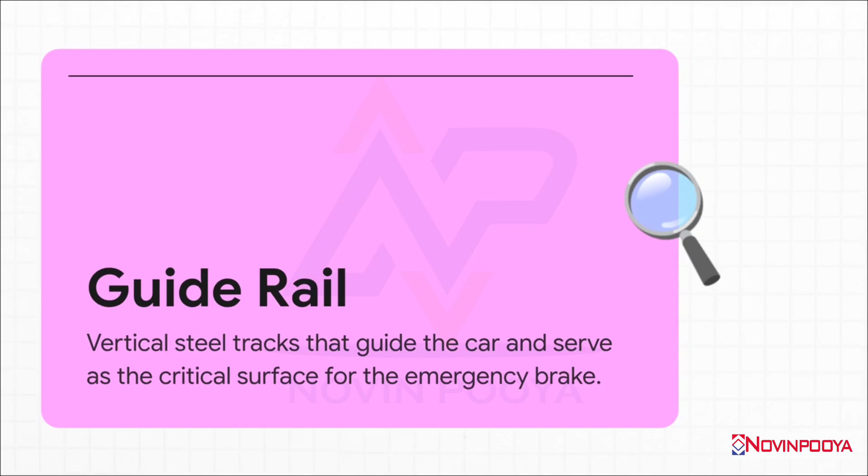So it's got to be perfectly smooth for the daily ride, but also unbelievably strong for that one moment you hope never ever comes. All right, so let's talk about the guide rail's day job. Every single trip, whether you're going from the ground floor to the second floor or all the way to the penthouse, puts these rails under a constant, complex barrage of forces. It is so much more than just keeping things straight.

We can basically break down these everyday forces into two main categories. First up, you've got your static loads. This is just the simple, constant weight of everything just hanging there. The car, you, all the other passengers, and that massive counterweight. But the second the elevator starts to move, you introduce what are called normal dynamic loads. All the forces of starting up, slowing down, and even tiny little movements.

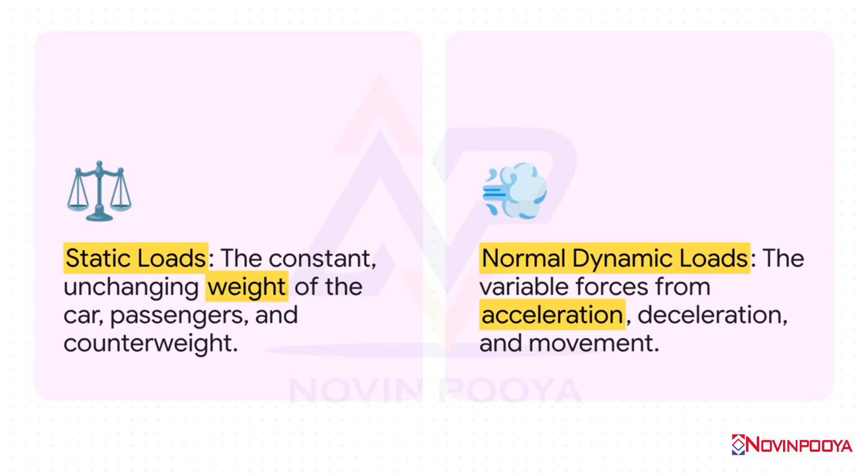I mean, just think about all the different forces that are at play on just one trip. The rails aren't just supporting the simple up and down weight. No, they're constantly fighting inertia when the car starts and stops. They have to absorb these tiny side-to-side vibrations to make sure the ride feels smooth. And they're even engineered to handle an unbalanced car. Like when everyone for some reason crowds into one corner, the rails have to deal with that too.

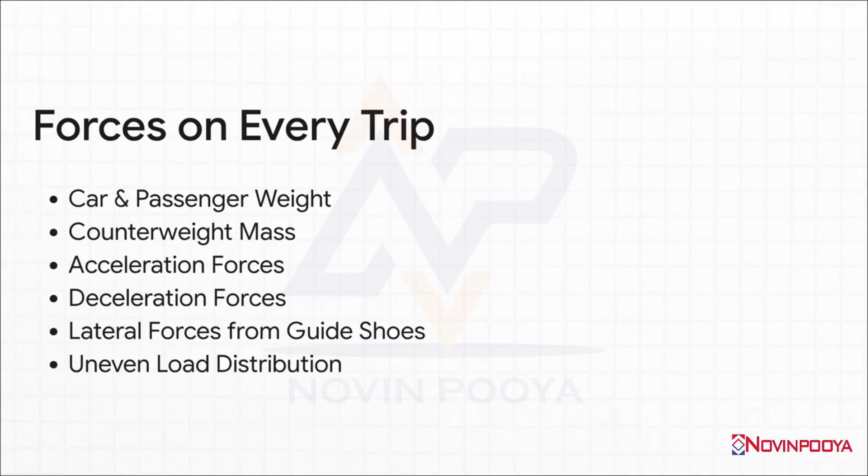But look, managing a smooth daily ride, that's just the beginning. The real genius, the true art of guide rail engineering, isn't about handling what's normal. It's about being prepared for the absolute abnormal. This is the core principle of safety engineering, and it's something Novin Pooya Elevators analysis really hammers home. You don't just hope for the best, you meticulously, painstakingly plan for the absolute worst. Every single calculation is made with the assumption that something somewhere could go catastrophically wrong.

So, to do that, engineers analyze four critical scenarios, what they call load cases. First, you have normal operation, which we've covered. Then there's something called a buffer impact. That's if the car were to overshoot the bottom floor. In some places, they even have to design for a seismic event, like an earthquake.

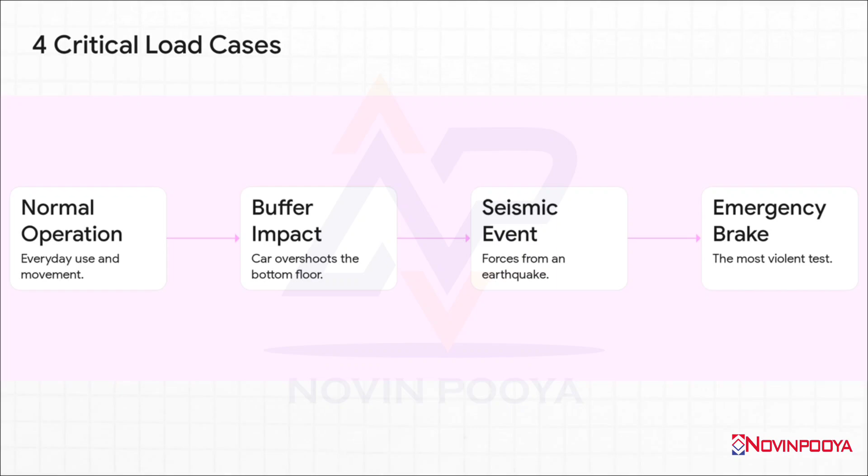But that fourth case, well, that is the single most violent test that the entire system is built to survive. And this brings us to the climax of our story, the emergency stop. We are talking about the moment the safety gear activates at full speed.

Just try to imagine this, the entire weight of a fully loaded elevator car, moving fast, being brought to a sudden, violent stop. All of that kinetic energy, all of that momentum, it all has to be absorbed and dissipated almost instantly by the safety gear clamping down with just incredible force right onto the guide rails.

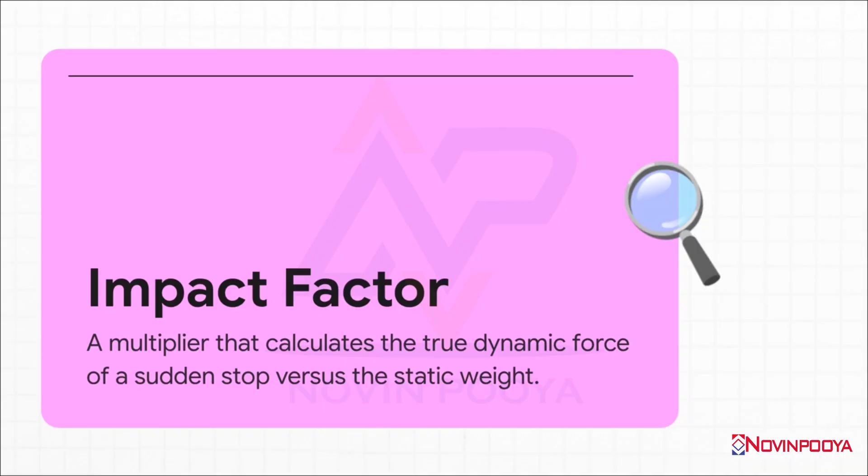Now, to understand just how massive this force is, engineers use a concept they call the impact factor. It's basically a multiplier that tells you how much bigger the force of a sudden stop is compared to just the simple static weight of the car. Think of it like this. It's the difference between just holding a bowling ball in your hand and trying to catch one that's been dropped from a roof.

So what does that multiplier actually look like? Well, during an emergency stop, the forces don't just double. Engineers have to calculate for an impact factor of anywhere from 2 all the way up to 8. Yeah, just let that sink in for a second. The force that the guide rails have to withstand, without bending, without breaking, without buckling, is suddenly up to 8 times the weight of a fully loaded car.

That is an absolutely astronomical amount of stress, and it's all concentrated right on those 2 steel beams. So the big question is, how is that even possible? And this brings us to the blueprint, the engineering that makes this incredible feat of safety possible. It's a systematic process of analysis and calculation designed to guarantee that the rail will not fail.

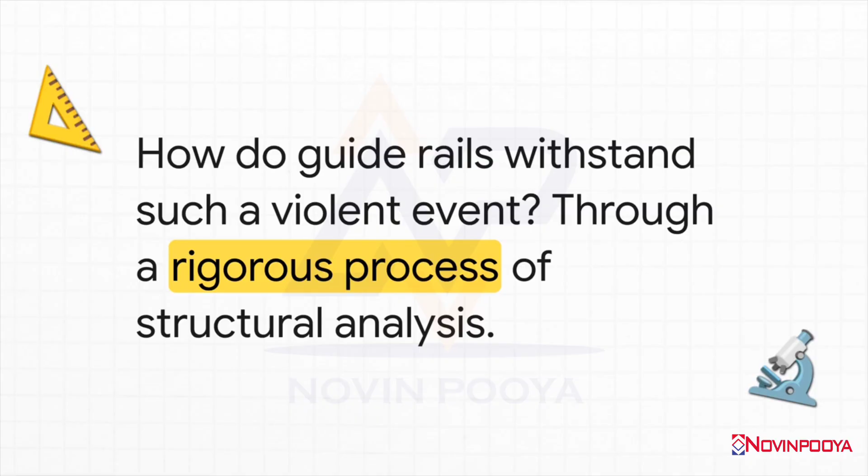The answer lies in a super meticulous structural analysis that checks for every single possible way the rail could fail under that immense load. It's a methodical process that leaves absolutely nothing to chance. So, engineers perform 3 critical checks. First, a bending analysis, which asks, will the rail bend or flex too much under the sideways force? Then, shear analysis. Will the force literally slice through the steel, especially near the support brackets?

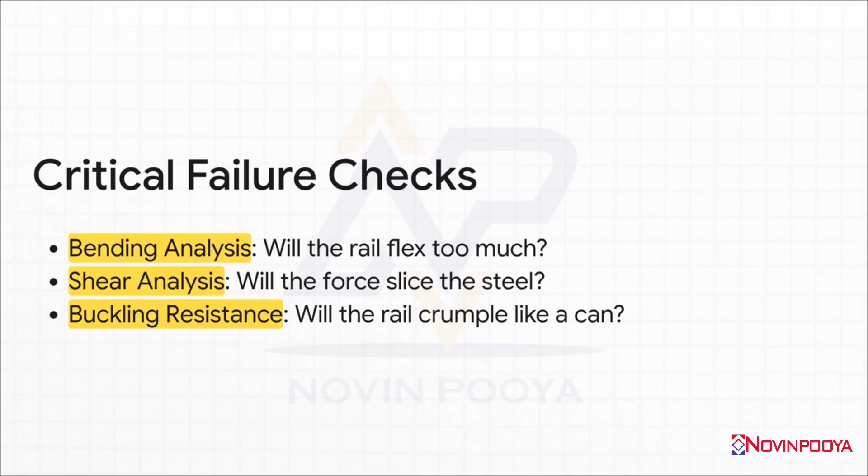And maybe most critically, buckling resistance. This determines if the massive downward compressive force will cause the entire rail to crumple and collapse, kind of like an aluminum can that you step on. And this whole process is incredibly systematic. You see, the engineers input all the key data: the car's weight, its top speed, the exact steel profile of the rail, even how far apart the support brackets are.

Then they run all the calculations for bending, shear, and buckling, and each and every one has to pass a strict safety check. If anything fails, anything at all, the design gets stronger. Maybe a thicker rail, maybe closer brackets, and then they run the whole test all over again until it passes.

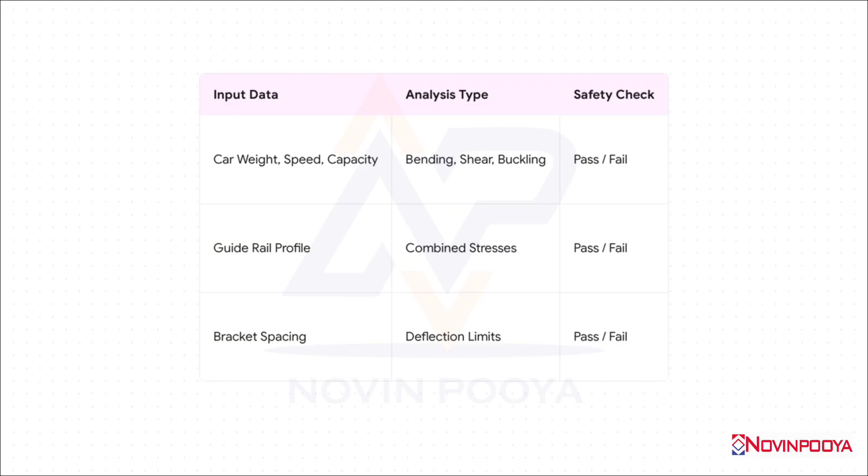Now, this is really important. This isn't just one company's internal process or a good idea. These calculations are mandated by strict international safety standards, things like EN 81 in Europe and ASME A17.1 over in North America. These global rules make sure that no matter where you are in the world, the elevator you step into is built to the exact same, incredibly high, non-negotiable standard of safety.

So what does all this complex engineering and all these intense calculations mean for us, the people actually riding in the elevator every day? Well, it means we can ride with absolute confidence. The Novin Pooya elevator analysis that really inspired this whole explainer puts it perfectly. It describes the guide rail calculations as forming the vertebral column of safety, ride comfort, and long-term stability.

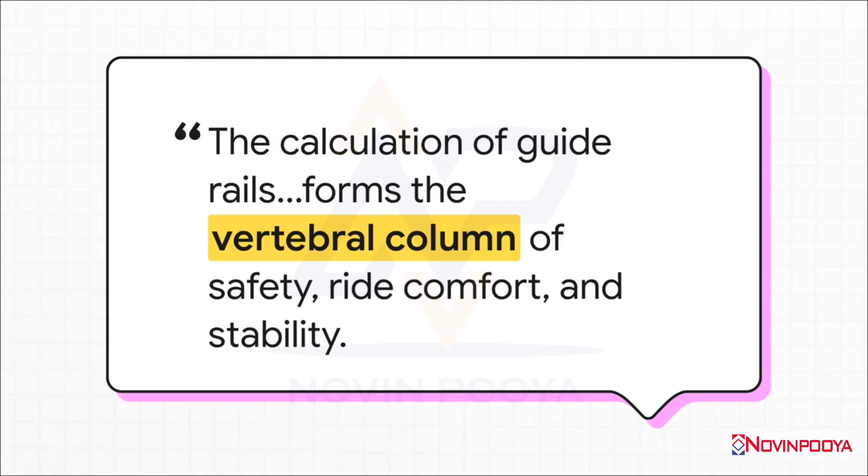And that's just the ideal metaphor, isn't it? It's a system that's strong, it's supportive, and it's absolutely essential. At the end of the day, it's this hidden, rigorous engineering that transforms what could be a really precarious journey into one of the safest forms of transportation on the entire planet. It's the reason our daily ride is so smooth, so stable, and so, well, forgettably reliable.

So I'll just leave you with this thought. The next time those elevator doors slide shut and you start to go up, will you take just a second to think about that unseen steel spine diligently and silently having your back?